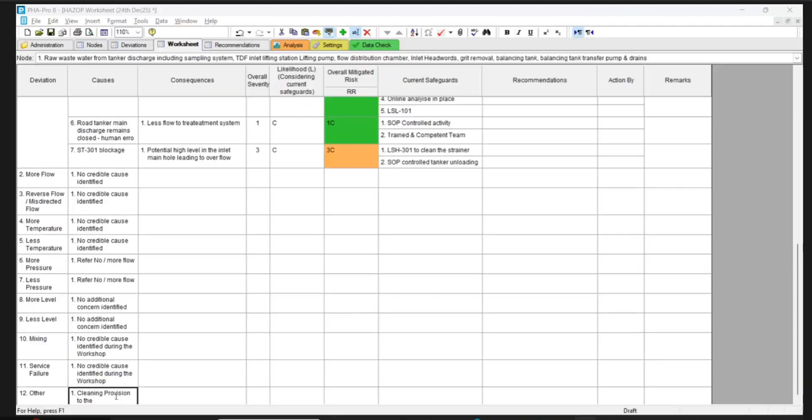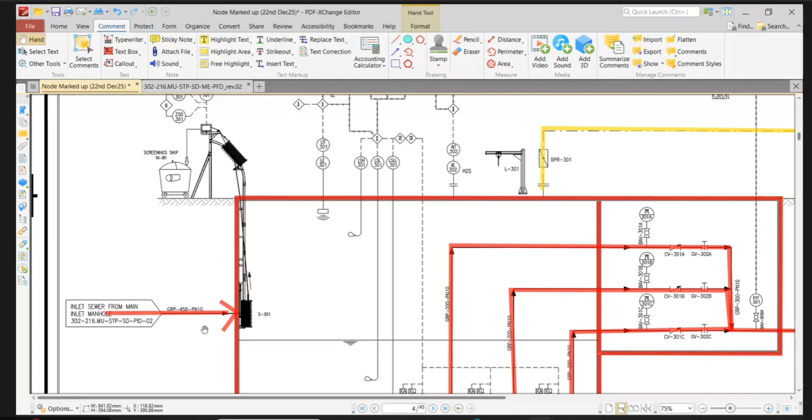How do you clean the space? You need service water. For cleaning, you have to lift the screen up. So for cleaning also you need water. We have utility water provided. Come down, just in the way you come down. We have a hose reel, this is the one. Hose reel is there, yes we have. Put that one, already tank considered.

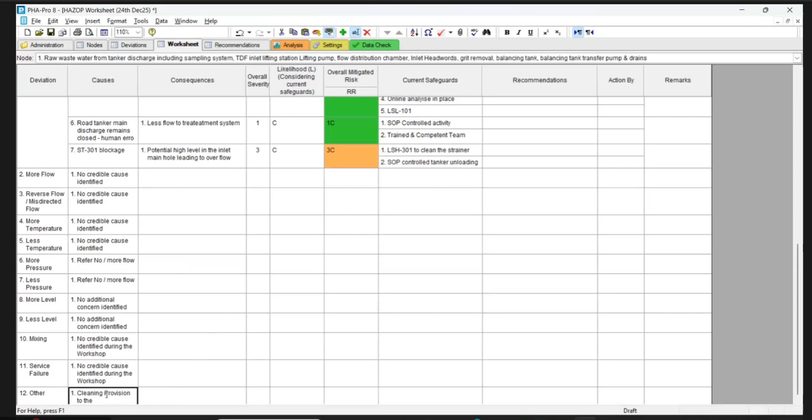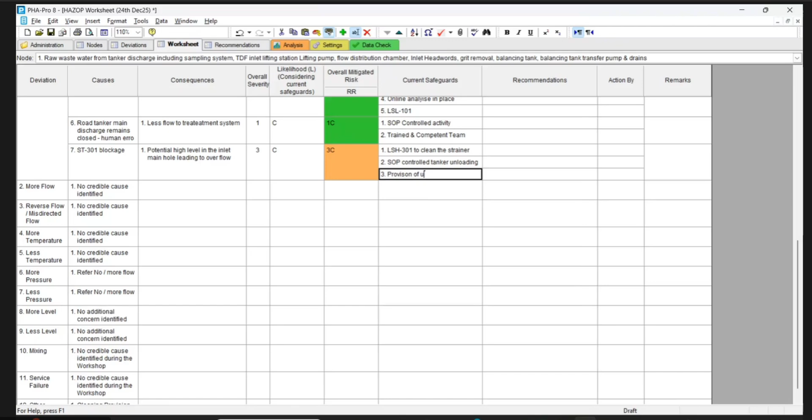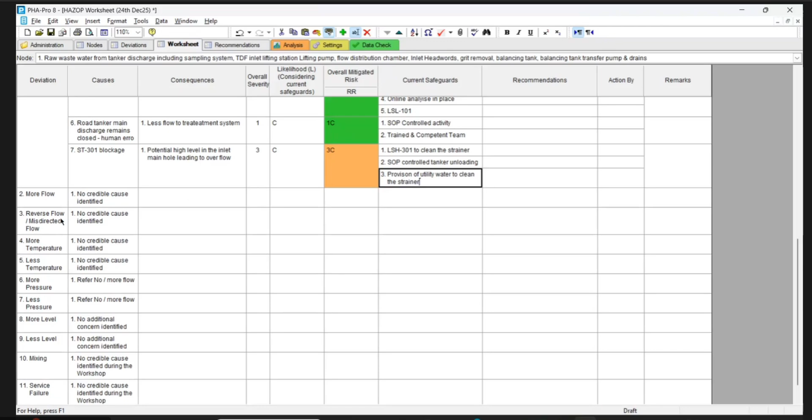Okay, I have covered here, so I remove from here. So that's okay. So guys, now we are here. We are saying after that the flow will go with the pump.

Yeah, we'll see review on more flow later. So now the pump trips. So we say high level here and no flow here. Running pump, what is the pump number? P301 ABC.

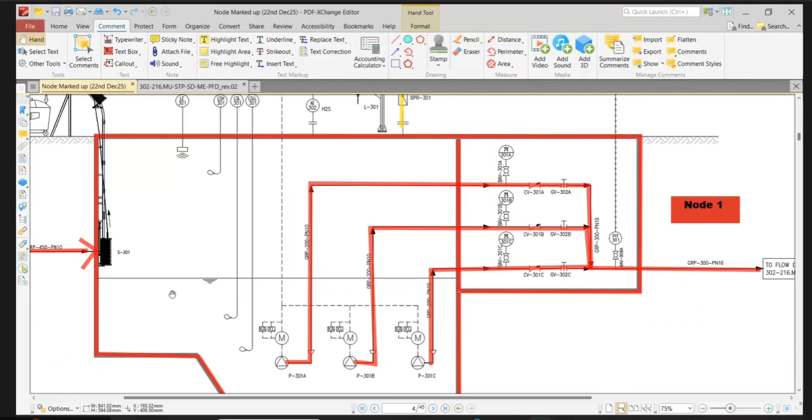No, we've done it. High level, potential high level in the tank 301. Tank 301 leading to overflow and less flow, and no and less flow, less flow to system.

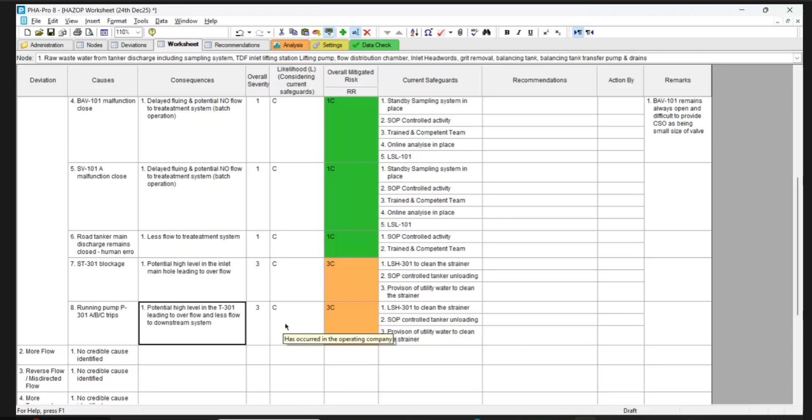So in this case, I'm considering same severity. LSH - what is LSH here? LSH 301, right, it's right. So the same, you are having the same tag number. All same number? No, it's not correct. Huh, madam? This is same number and this is same number. LSH 301.

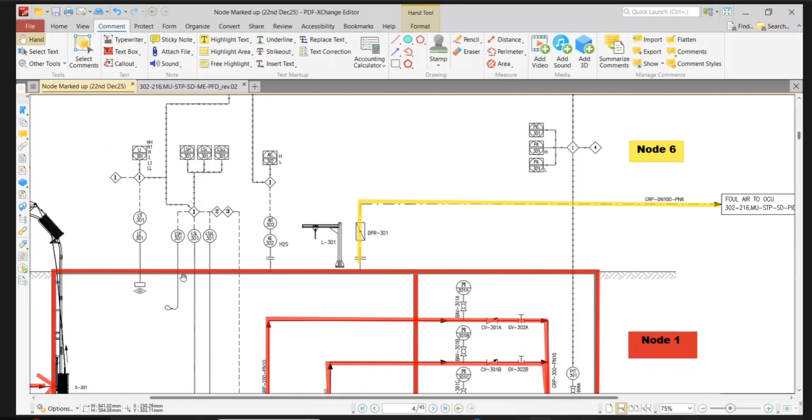Actually, in the revision, this is the... the first one should be done for the numbering.